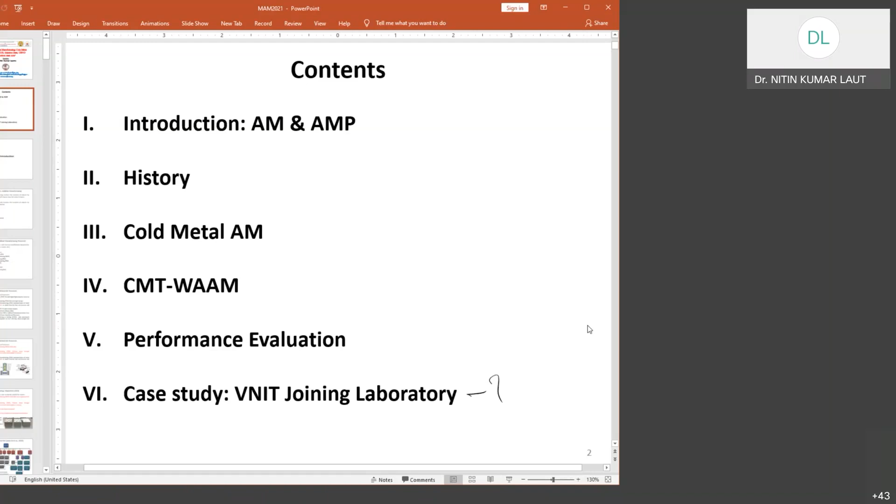Let's start with the introduction, starting with our basic additive manufacturing. As you know, we use additive manufacturing because we have a specific objective: we want to create an object by adding material.

So we are very much clear that we are going to add something, and how we are going to add it, and with what quality, that all depends on the material, the surroundings, and the processes. Obviously just adding material doesn't give us that much freedom, it's not that simple a process.

So obviously we have to search for different methods, different procedures, and CMT, cold metal transfer, is one of those metal transfer processes, but it is also widely used in additive manufacturing.

What is important here is every time we believe that whatever we are adding has to be in layers. It's not true. It could be a point addition where you are making heaps one over the other, like piling up bubbles. So it's not that every time we have to believe in layers, we can do it in other ways also.

Or we can just overlap two things, maybe like a part or joint. Still, that would also be called additive manufacturing. And why I'm discussing all this is this process has the potential to go the other way around, instead of depositing layer by layer, you can even deposit from sideways also.

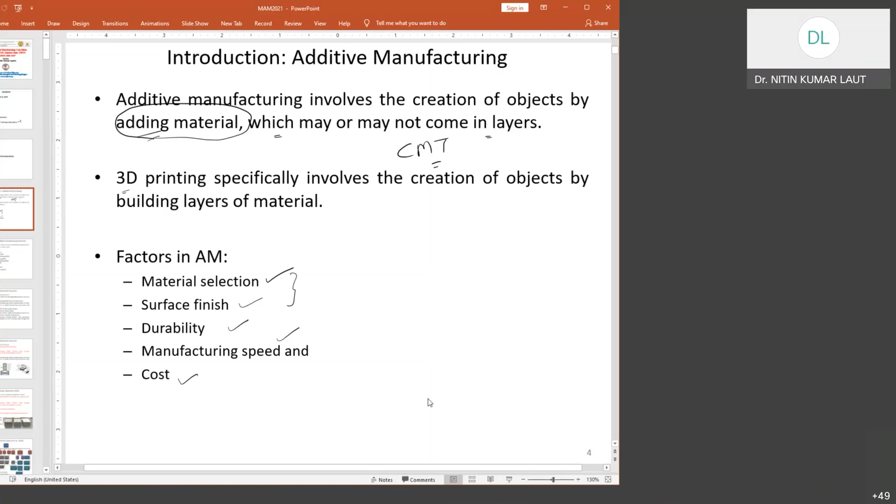But anyhow, it all depends on your application, what your application is, and how you can optimize these factors. As per that you should have choices for selecting the processes. So let's talk about additive manufacturing processes which are widely used and well established.

But there is one more very peculiar thing about additive manufacturing processes: we actually rely on these processes whenever we want to do any internal modification. This internal modification is a major constraint in your conventional manufacturing processes.

The reason is very clear. If you take a simple example of lathe machining, let's say this workpiece is revolving, so your tool has to enter from outside. In some cases, if you want to do boring and these things, you have to ensure your tool is taking a particular path and reaching that position or location where you are going to perform the machining. Now imagine if this is very small, how complex things become and how complex your tool selection and other factors depend on it.

So we have certain constraints here, whereas this internal modification is not that difficult if you switch over your whole manufacturing process with additive philosophy or additive fundamentals. So this can be found very useful compared to conventional manufacturing processes, where mostly we need good flexibility to do internal modification. That flexibility is a major hindrance if you are using a normal or conventional process, because most of the time you have to ensure that your tool is reachable to intricate parts or locations, which is really a challenging thing in your conventional process.

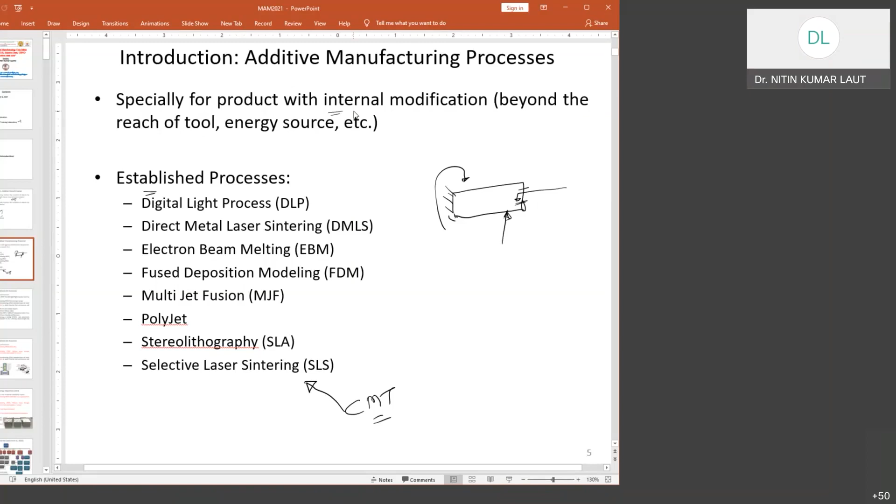We are not going to touch all these processes—obviously it's not the scope of this presentation—but the idea is to show you where our process stands or where we are working. Our process is not as established or as popular as others in this list, so it is still struggling to get a place as an established process among all available additive manufacturing processes.

The detailing of each process, where it is used and for what purpose, is very well published. As per ISO 2010, every process has been properly recommended for specific applications. Some processes require extrusion fundamentals, like FDM. Some require laminated layer processing, like LOM, laminated object manufacturing. Then there's multi jet fusion, where we form a layer droplet by droplet. There's also stereolithography and other old processes that mostly started with polymers but are still finding applications—so there are varieties of well-established processes.

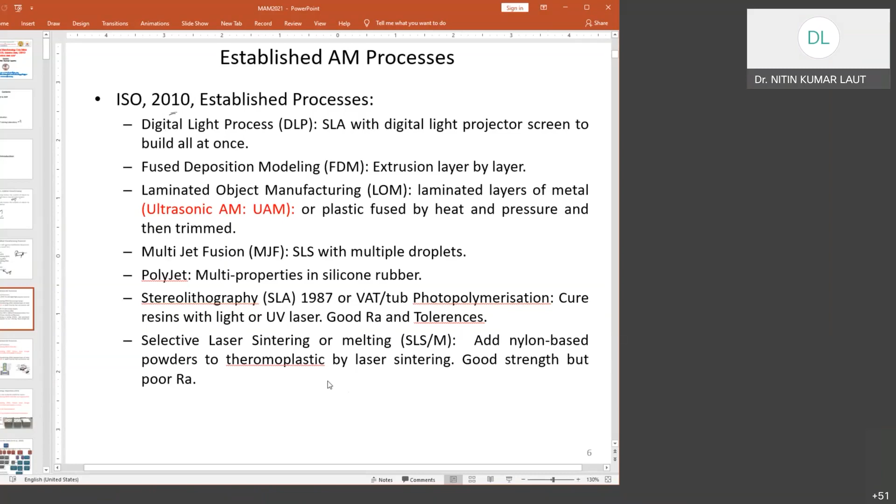So why are we going to newer processes, or why are we researching this newer process? That also you will realize as we proceed further.

The idea of this slide is that there are some specific processes for metal, which is the core focus of this Atal program. We have processes like direct metal laser sintering, so you can have a processing facility with metal. Even electron beam melting facility is also there—these are also established processes.

Even laminated object manufacturing goes both ways, where we can make a product with metal as well as with plastic or polymers. When using metal, we rely on ultrasonic processes, using ultrasonic ramming or pulse frequency of hitting the metal, to build the product layer by layer.

So we have unconventional process interference in metal additive manufacturing, where we use unconventional tools like laser, electron beam, and ultrasonic assistance. These are used to process metals because nowadays there is a need for processing metals. The era of processing polymers through additive manufacturing is losing interest, though it hasn't died off. Now metal processing is coming up because of application requirements, mostly in the aerospace field.

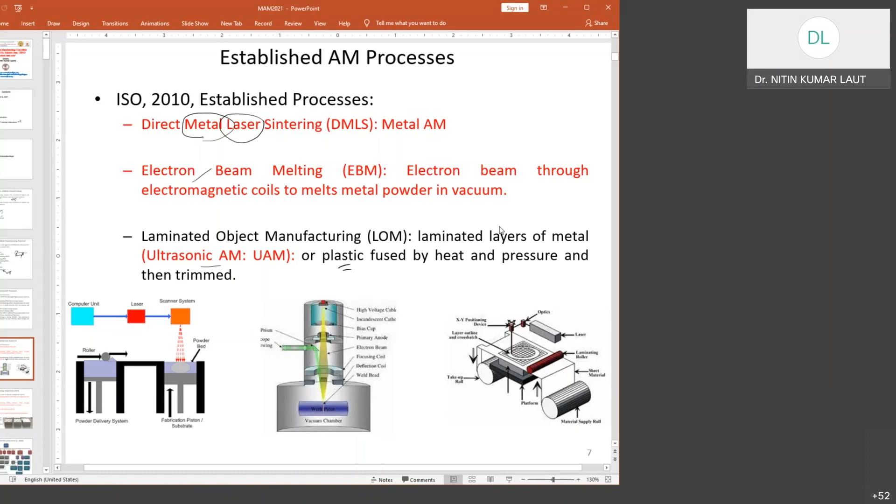When you try to understand this process, its application, and its scope, you will realize there is some gap, some scope which we can always encash to develop a new application, or let's say a new process.

Mostly when using metals, we have two options: either we use metal as a powder form—again recommended in 2010 by ISO—or we use wire. So either we sinter powder, or we melt wire to form a layer by layer product. All these are covered under the philosophy of direct energy deposition.

Mostly these applications started with repair work, not for building any product. Nowadays they are being used extensively to manufacture products.

As you go down from laser to EBM to ultrasonic to metal binder jetting process, you'll find the reliability, robustness, and confidence of making the metal additive product getting degraded. The process establishment you'll see in laser assisted processes, like LENS which stands for Laser Engineered Net Shaping, gives more flexibility, confidence, and reliability. So lasers are overruling additive manufacturing, no doubt about that, followed by EBM, then ultrasonic, then metal binder jetting. But most applications are surrounded by laser as the major energy provider process or tool.

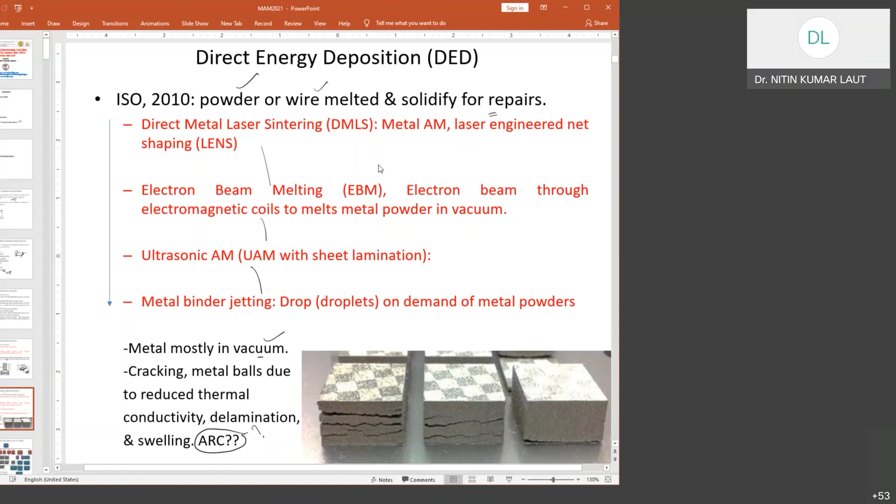So here comes the basic requirement or necessity of going to a newer process, which we will be discussing further. The idea was to give you a background on why we are moving to a newer process, because we have to see if we can get better facility in terms of vacuum, can we avoid that requirement. So yes, we have this process CMT where we don't rely on vacuum. Cracking is also less, we don't allow the layer to form metal balls - it depends on your material and parametric settings. Delamination is also less, swelling is also not allowed, because the process is getting adjusted within microseconds or seconds. There's a lot of physics going on which tries to ensure this can be reduced or controlled. So let's switch over now to the processing of things using electric arc.

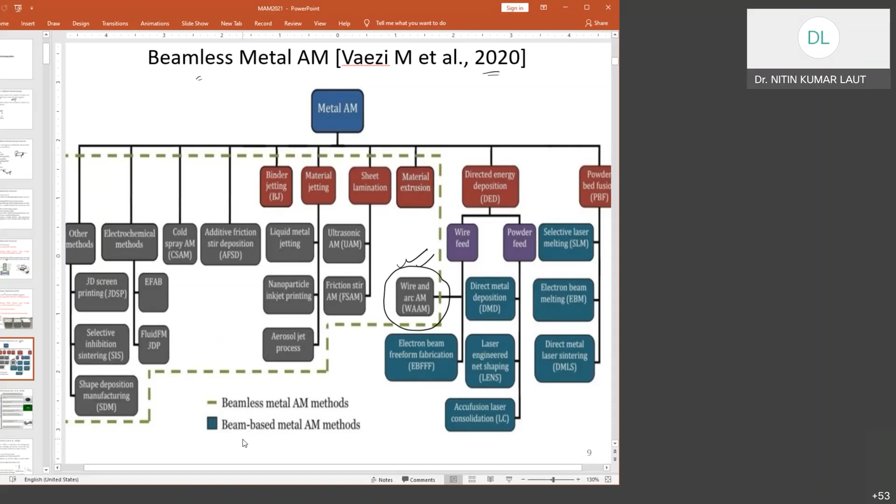So we are discussing, or will be deliberating on this domain, which is a part of beamless metal additive method. This is from recent reference. We have built enough background, and I don't think there is a need to tell you about the historical development in metal additive manufacturing. Maybe some speaker might have covered it also, maybe in coming days they might be covering the things.

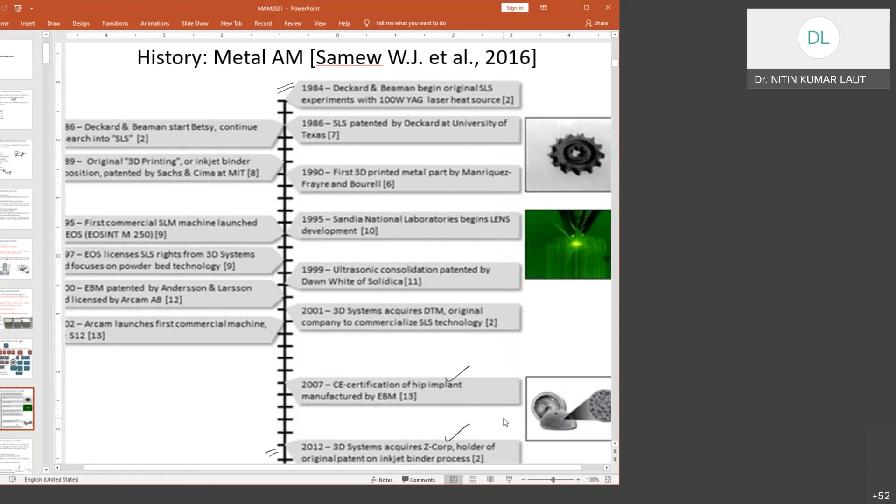The idea of presenting this slide is to see the era from 1984 to where we are now. There are a list of developments, but nowadays you'll find the development of additive manufacturing is diverging to many fields, whether you talk about biomechanics or aerospace products and lot many things. People are still working on that, so the area is still well researched. In other words, in some areas you'll find a lot of research is required.

So we will come just at the boundary of cold metal transfer, but we find some similarity of this cold metal transfer process to yet well established process, that is cold spray additive manufacturing. If you can anytime refer this paper, you will understand that people are developing good understanding, or well optimized process understanding, on this cold spraying.

This cold spraying basically works in solid state, where there is no proper melting to allow the metal to reach the melting point. There are different physics which we will be using, physics of friction stir, ultrasonic welding. Mostly this cold spraying is suitable for non-ferrous material, like aluminum, magnesium, and copper, and mostly this cold spraying is used for coating purpose, where we try to spray the powder with high velocity.

But if you want to use wire, and deposit this wire as a coated thing, obviously then you cannot throw the wire with high velocity. So even this process appears to be one of the solutions, but still the scope of using wire is lagging. So now we are building why we are going to a new process, because I have to show you the disadvantages or limitations of other processes which are in close periphery or competitor of these processes.

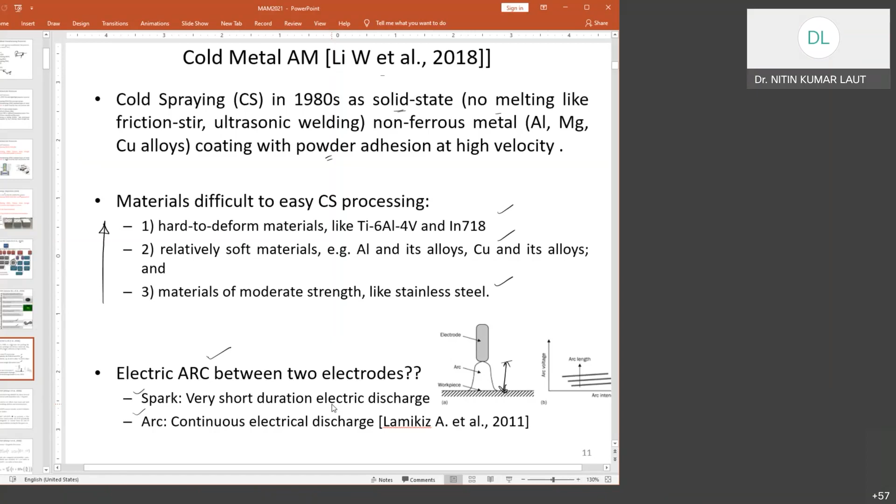I hope we have built up enough background of these surrounding processes which are near to cold metal. So now let us come to the process which is the agenda of our discussion, that is cold metal additive manufacturing. Details are very nicely narrated in Zhang's paper published in 2018. There are other papers also, but I found this detailing very simple and effective.

So when we talk about cold metal additive manufacturing, mostly this process, in short, is written as CMT, which stands for cold metal transfer. Now, although this is a misnomer word that things would be cold, and if it is cold, you cannot transfer metal because it will be a solid object.

But here the cold word is actually a relative word, relative to your expected heat input, it is much low, and that's why it is concluded as cold metal transfer. So metal will be hot, but not that hot which you expect with the voltage you are providing, or the already well established fundamentals of electricity and electric arc generation. They are not matching with this metal melting. So it is relatively very low, and that's why we say that it is a cold metal.

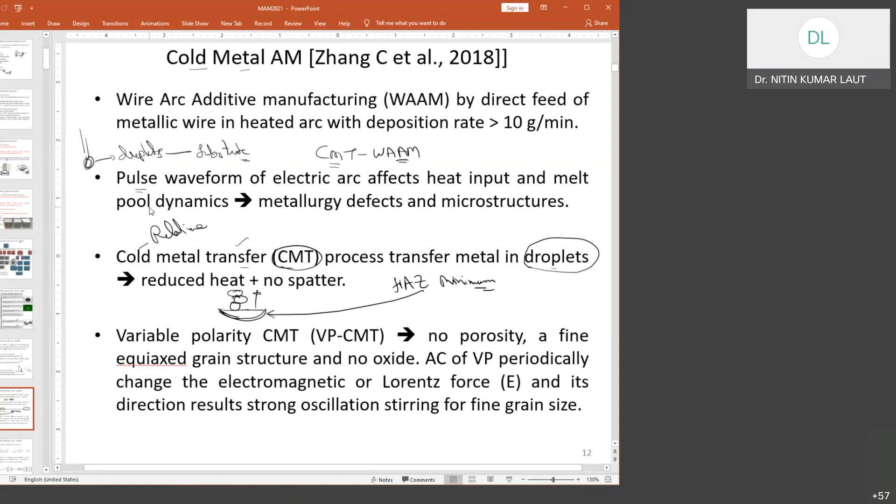We'll understand the mechanism here. This pulse waveform control gives you the droplet facility, which affects your heat input and melt pool dynamics - one of the dynamics I have discussed with HAZ, heat affected zone. So obviously if you are working with controlled heat, your metallurgical defects or microstructures are much improved than any other normal electric arc process.

As we were discussing the variation of processes in terms of pulse waveform, the same thing is narrated another way using the same philosophy of electrical engineering, that is variable polarity. So we can work with different polarity if we are not comfortable with pulse waveform control - you have the facility of playing with variable polarity. Those who have worked in electric discharge machining would understand the importance of polarity, and if you want a particular surface finish, how you play with that polarity.

The same thing happens with another version of CMT called VP CMT, which stands for variable polarity CMT. You vary the polarity between two electrodes, and what you get is an effective property with no porosity, a fine equiaxed grain structure, and no oxide formation. You also work with this electromagnetic force or Lorentz force - you can play with this force because in weld pool dynamics, this electromagnetic force plays a major role in developing or controlling the defects.

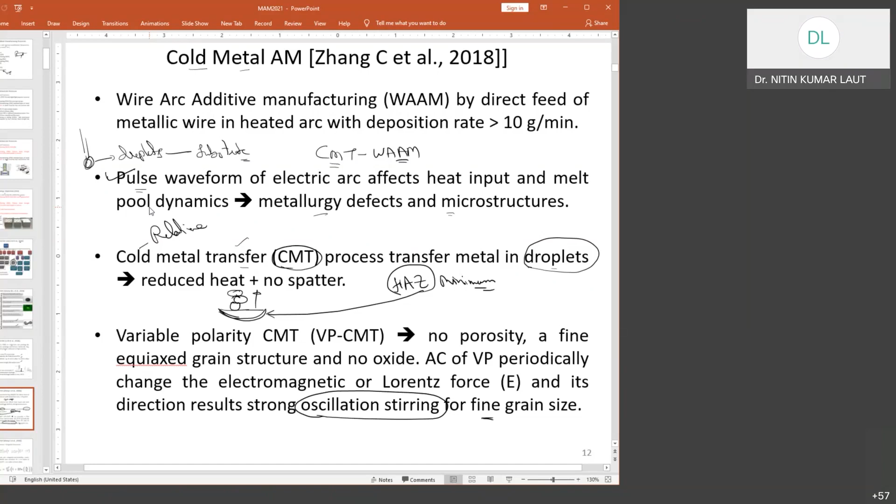Because we are changing this variable polarity, one of the biggest advantages we get is the facility of stirring or mixing the droplets, or the composition of the droplets, so that you get a good fine grain size, which is very much required to have good strength in your material, the substrate.

So I think now the basics of CMT we have made clear, but yes, there are a lot of numerical simulation works also ongoing in this field. Since we have talked about electromagnetic or Lorentz force, these forces depend on the current density vector and magnetic flux vector - we generally work with the cross product of these current and magnetic flux vectors. And if you try to relate these vectors with the geometrical parameter of your wire, you will find we try to include R and Z, as if the wire is in the form of a cylinder.

So obviously, if you have a cylindrical wire, you know what you have to consider. This is the R, and the height is your Z. So even this electromagnetic force has some dependency on this geometrical parameter.

Directly you can't use powder, wire will always be there. That's why the electromagnetic force equation will surely have terms like R and Z all the time, because that wire presence is a must in this process. Otherwise, how are we going to create that R?

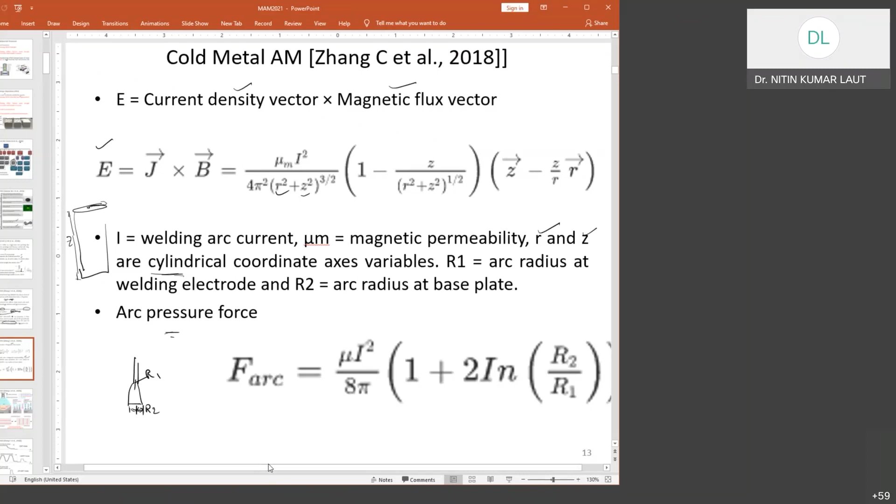So you can understand that even the dynamics of generating the forces are also not that complex. The only thing is it's in the logarithmic form of this geometrical radius.

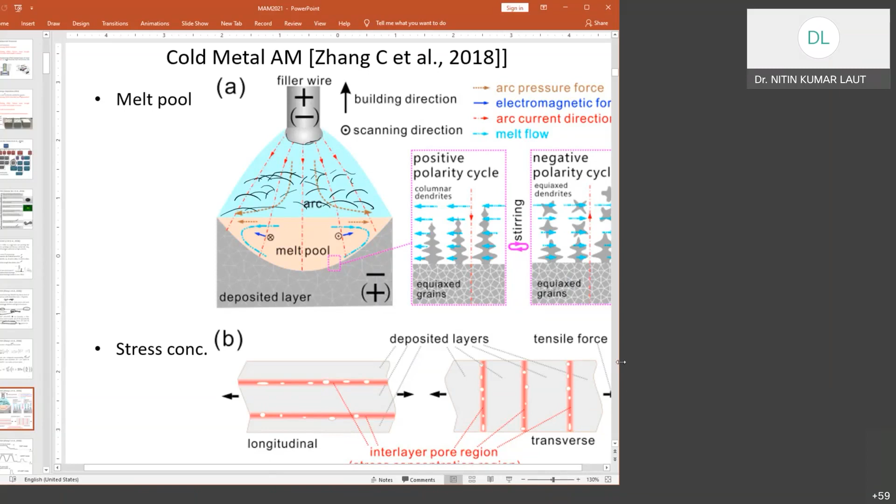So here the added advantage we get is proper stress concentration control, because we are actually not working with high intensified heat. That is again a controlled heat, or let's say a cold heat, relatively cold heat. So even the issues of stress concentration, specifically at the interlayer, are also less in this process.

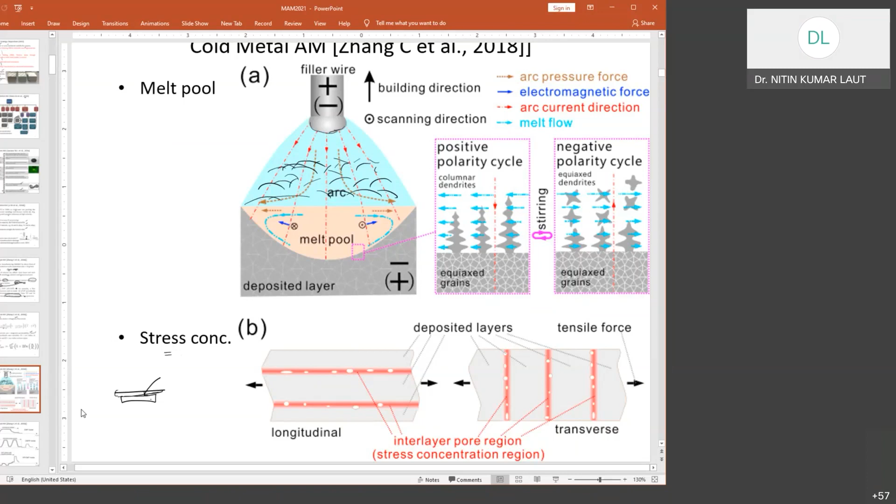Because once you deposit layer by layer, there is a lot of stress concentration between this interlayer region, because the material properties of the bottom layer and top layer are totally different from each other, and getting a fused joint between them has to bear the problem of stress concentration. Since we are working with relatively low temperature, this problem is not a major issue if we are going for the cold metal additive manufacturing process.

So as we were discussing about the pulse modification or waveform modification, when you have cold metal transfer mode as your standard mode, you'll find they believe in two different phases. One phase is the short circuit phase, where your electric arc is actually touching your base metal - that is called the short circuit phase. And then you have the burning arc phase, where this arc is being burned or supplied with heat, so that it gets detached from the electric arc and gets deposited on the substrate.

But this is a standard CMT mode. You are having other modes also - this thing we have discussed, variable polarity. Now this CMTP stands for CMT pulse mode, where you try to change this phase into a pulse phase.

So you make a trapezoidal pulse form, so that the heat distribution - if you try to take this area, and if you try to take this area - you will find if you are breaking the whole heat into a number of steps, it gives you better control or better focus on your heat distribution.

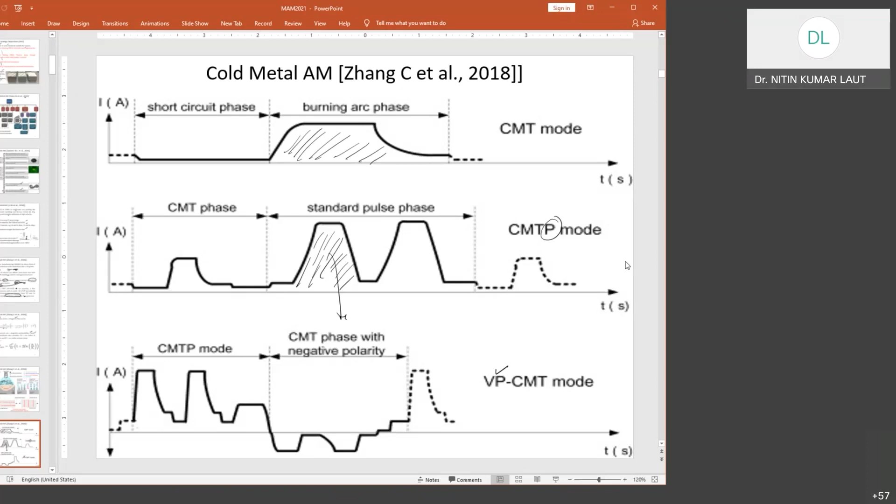So CMT mode is one, the CMT pulse mode is another, then variable polarity is yet another mode, okay, of the same transfer of cold metal from the wire into the weld pool zone. So we have various versions or facilities to deal with this CMT process. Anytime if you want more reading, please refer to this paper. It's a very good paper.

Now if you try to compare the parameters on numbers, you will find if you are going with normal CMT, you can keep your heat input the same, or even your interlayer wait time. So what is this interlayer wait time? You have to see that your first layer is formed, and then after a certain time, where you fix a temperature to be achieved at the top layer, after that temperature your other layer gets deposited. So even if you keep that time fixed, still you will find that the arc current or arc voltage keep on changing, because we have to play with the pulses.

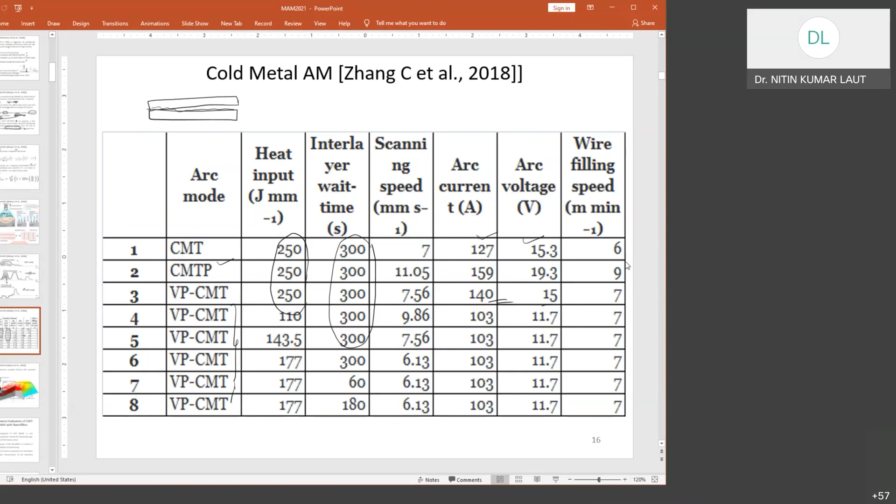The pulses are modified, so as per the pulse, your properties or parameters of current and voltage are also going to change. So you can find some changes here, but when you switch to variable polarity CMT, you try to fix the arc current and voltage, but the only thing you change is the nature of the polarity, to get the same or similar effects. So variable polarity is not that popular, but playing with these pulses is mostly a research domain, or most applications get good results just by playing with the pulse waveform, which again is the backbone of this process.

If you refer to another process where they have discussed the detail of metal transfer using simulation and validation studies, anytime you get a chance please refer to this recent paper by Cadiou, 2020. This process tells you, and color-wise also you will realize, this is the heat transfer. If you can control this relative heat transfer, the solidified zone is followed by this zone, which is again a very narrow zone. So your solidification rate is also very well controlled or moderate, because you are depositing relatively cold metal here, so the stresses and the temperature gradient drop are all very well controlled.

And this is the wire movement, because the droplets are getting deposited, it has to be compensated with the wire movement. All this data we have already discussed here - what would be the wire movement, the wire filling speed, all this is there. So this is our plasma formation, and these droplets, how they get deposited and how you get layer by layer - all things are very well described here, specifically the droplet mechanism. A very nice detail of this droplet mechanism is given in this paper. Otherwise, we have already discussed this.

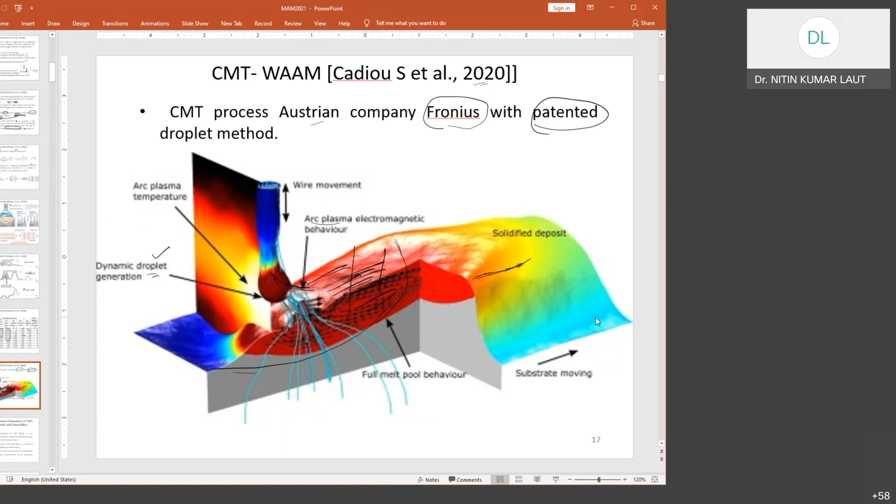So as far as the background of this CMT process is concerned, historical perspective - this CMT process has been developed by Fronius company, which is an Austrian company, and this is a patented process. Although it relies only on droplet transfer small physics, the way they have achieved that is patented. Fortunately we have this facility, and although it's costly, it is very effective and shows better results than the nearest processes we have, metal inert gas welding and TIG. This CMT is showing better output or results in terms of product manufacturing or product welding or joining.

So now, after a brief discussion on the process as such, let's show the output, because nobody will believe it unless we give you the performance output we got. This has not been published anywhere yet, but it's what has been researched and obtained in our lab at VNIT Nagpur, where we have assessed the performance of the process using a nanofiller. So we have wire here, and we have powder, but the powder is in nanofiller form. So all these things are used within the domain of wire metal transfer.

So we set an objective where we used this process under the umbrella of WAAM on 316L stainless steel to construct a 3D part, using additive manufacturing as the basic principle. So far we have achieved that with different complications and problems. We have also studied the influence of nanofillers or nanopowders during the development of this 3D product. We chose a complex product, but I'm not going to present those results here. I will present the simple layer to layer manufacturing process, which is part of this 3D process.

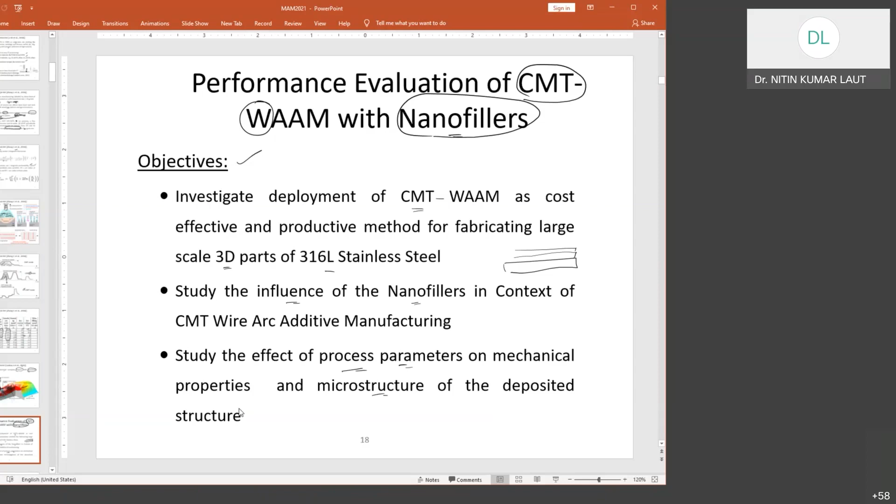So let's go into the detailing of this thing. I hope time is there.

All credit for this goes to my two PhD students. Anand Vamshi is one of the dynamic and hardworking students, and the other is Amit Motwani. These two are really working hard on this, cracking some out of the box results. Unfortunately, I'm not going to present that because we still have to do a lot of iterations to develop confidence in it.

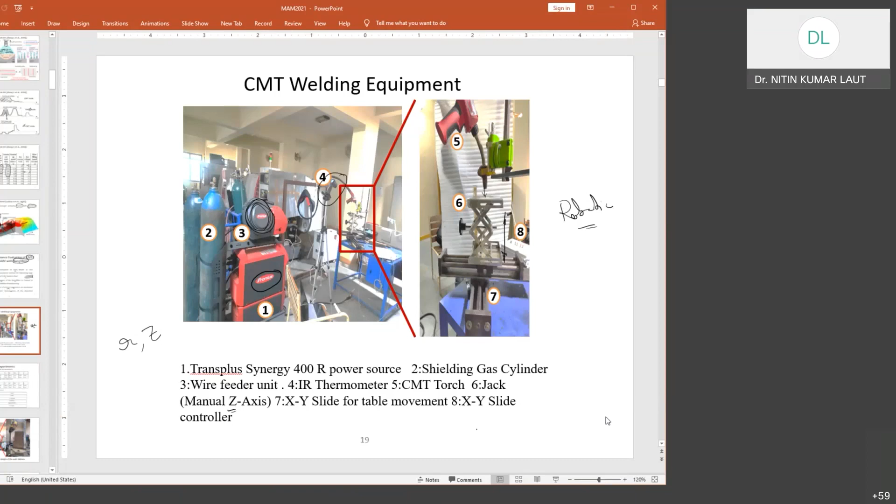Yes, somebody - am I getting some query? Anything from any participant? Do I have to address any query? Okay, by mistake, I think.

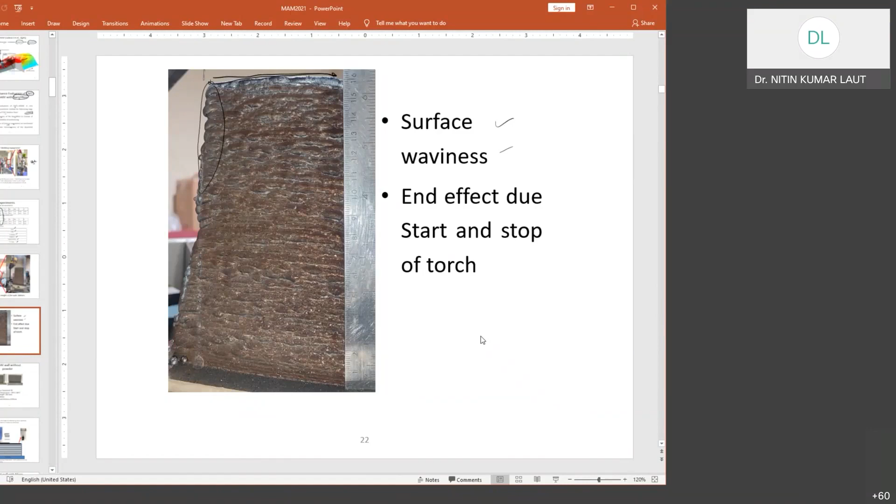So there is a comparison where we have used the process with powder and without powder, so that we have a better understanding of the role of these nano powders whatever we are using to generate the layers. So these are some of the parameters.

50 layers are being deposited, and here's an important thing: these researchers have tried to ensure the interpass temperature between two layers. So this is one layer and this is the other layer, and the temperature in between these two layers is called interpass temperature. They have ensured this using an infrared temperature measuring device, making sure it is dropping up to 150 degrees centigrade, plus or minus.

And after that, they are ensuring that they are depositing the second layer. So it's not that they deposit continuously one layer after another, but they are stopping, ensuring the temperature drops to this optimized level, because this is the optimized heat desirable to get a proper joint. Again, after reaching this interpass temperature, they deposit the second layer, then wait, then deposit the other layer.

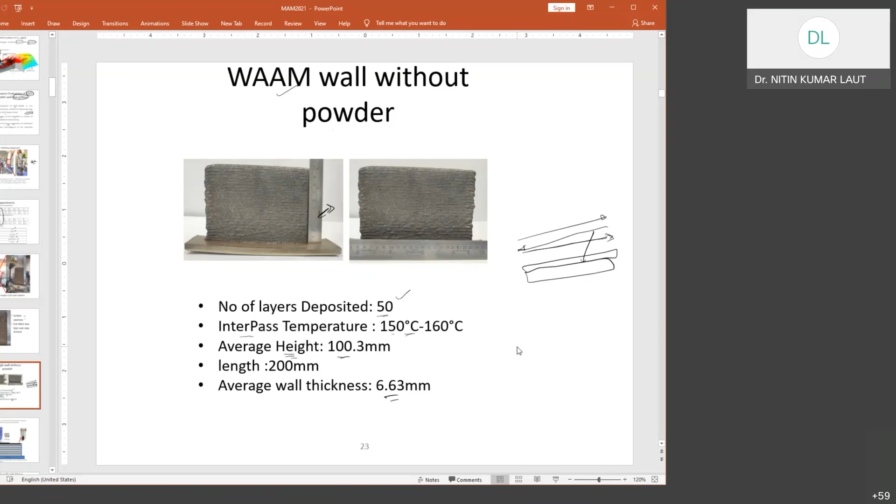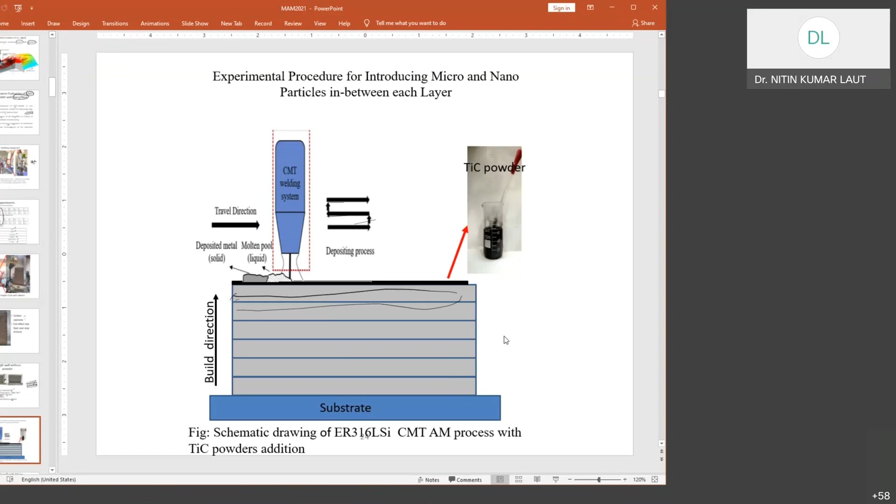So we have compared the additive manufactured product with and without powder, but specifically we have used nano powders.

This is again some more confirmation with nano powder. The earlier case was microparticles of 2 to 5 micron size, and this case is nanoparticles of 50 nanometer size. So we had three variations: one without powder, and with powder we developed the product with micro and nanoparticles.

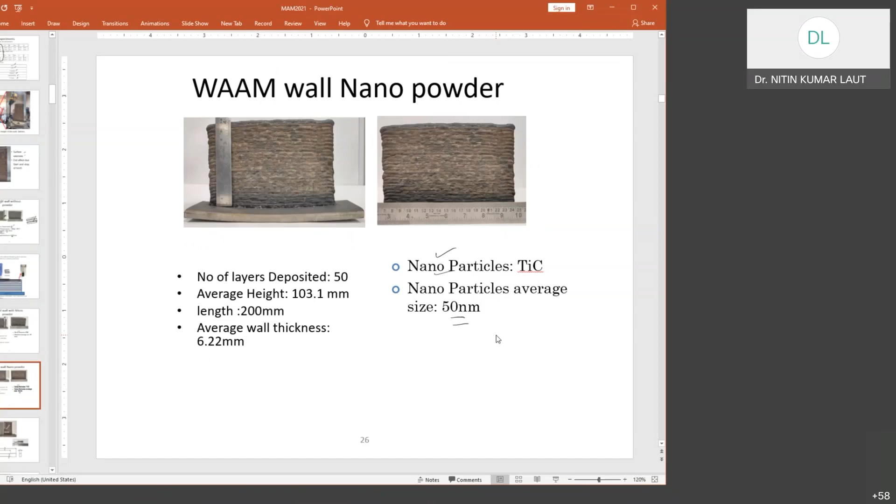For characterization, we cut standard specimens to check strength, and while cutting these samples, a proper procedure was followed. We used standard wire cut EDM process to cut this, so that we don't induce any extra mechanical stresses or residual stresses while cutting the specimen.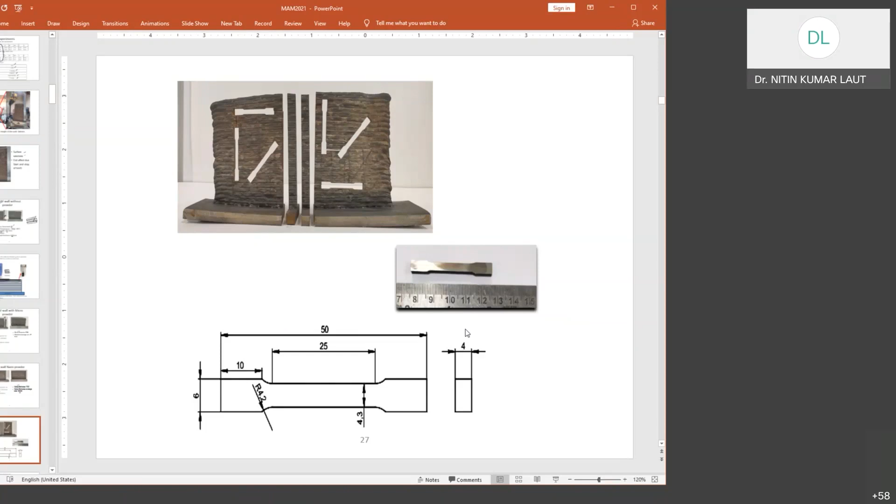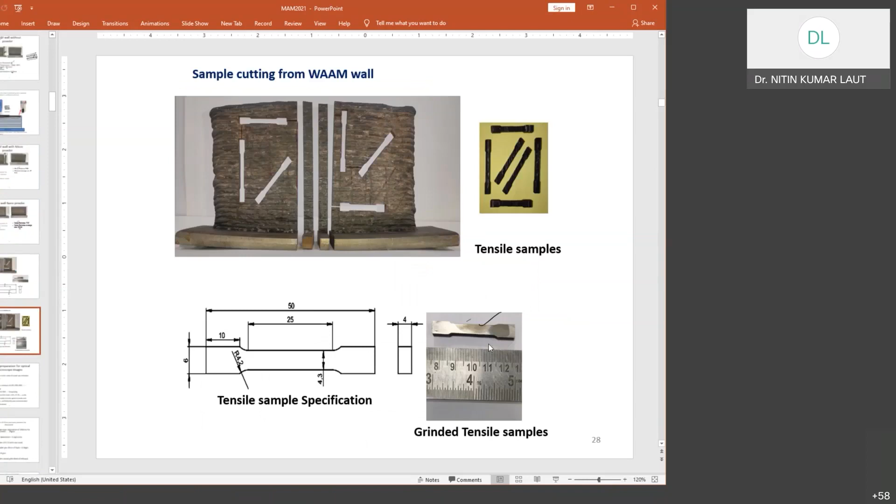These are the specimens cleared from the developed layer. Before testing, a procedure was followed for preparation of samples—these are all regular processes, nothing to do with the CMT process, like degreasing and improving the surface finish. These things are nowhere affected by the CMT process.

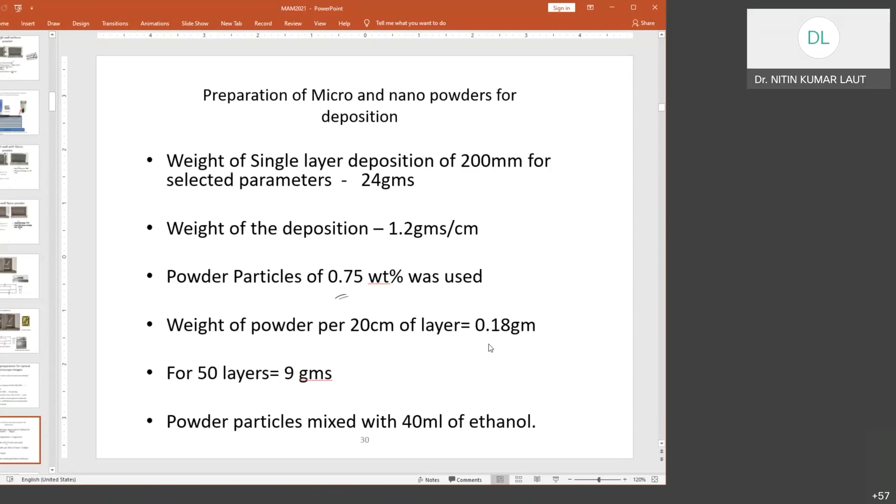I'll skip this, but efforts were made as per procedure to make this a standard specimen. These are different parameters, may not be directly linked with the process, but powder particles of 0.75 weight percentage were used. These are descriptive things, but here are the results we got.

We still need to see if we can get better grain distribution or microstructure, although this isn't bad since we hardly get any defects, foreign inclusions, porosity, or cracking. This means the addition of powders, specifically nano powders, carries some meaning in the process. We are still working on that.

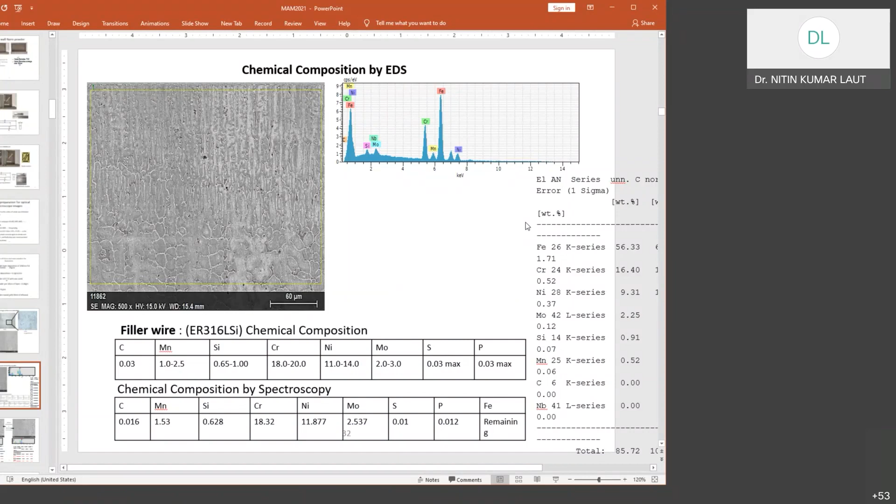That again is a good observation. Despite subjecting the process to a lot of heat and many layers, we're still getting a somewhat moderate composition distribution over this layer, specifically the central layer.

This shows the phase confirmation, and we get some unusual components. We are still checking this nickel, chromium, and molybdenum content. This is a matter of research—the idea is we get some unusual observations, but unless we get confidence with more processing, we cannot jump on any physics. We are still examining more samples to get more know-how about how these newer elements are getting added.

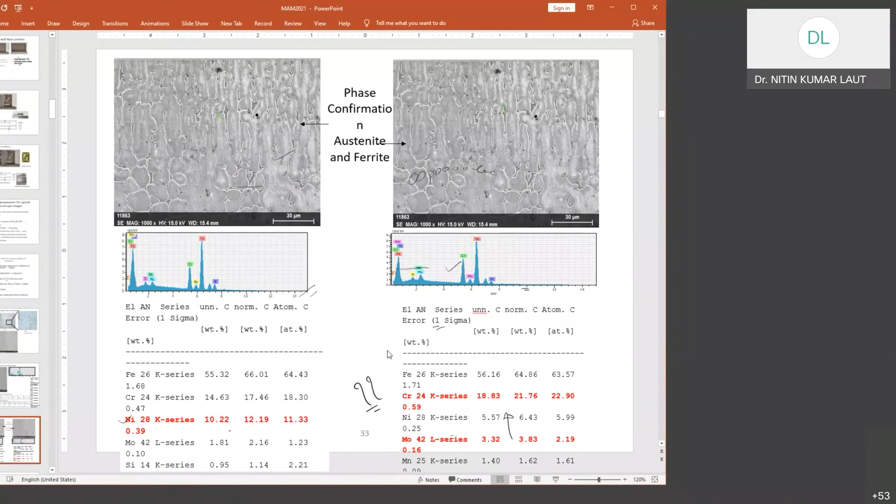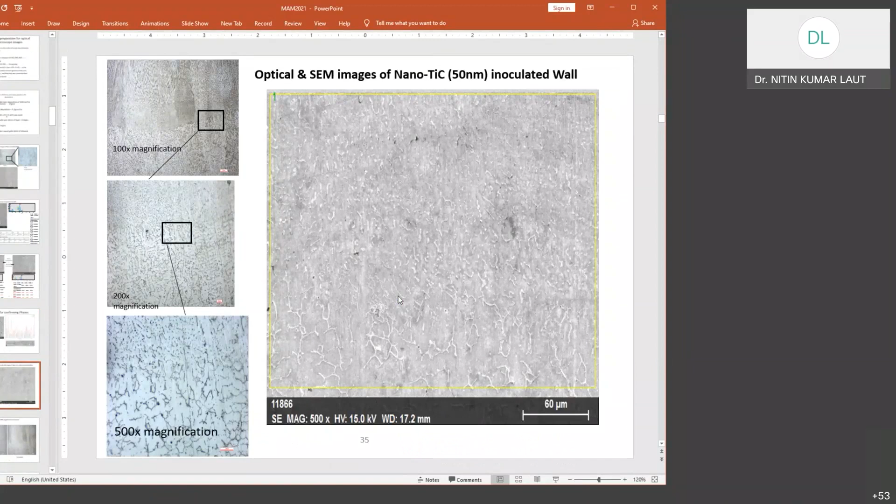So this is not that important, but we can see this addition of nanoparticles. After adding nanoparticles, we could hardly see any major changes in the substrate. But as far as strength and other things are concerned, we'll find some better improvement in that.

So these are all magnified images, elemental distribution, and see the distribution of titanium, how uniformly they have been distributed. Because in an earlier slide we talked about the stirring mechanism generated in the droplets of CMT, which again depends on that electromagnetic force we discussed earlier, and the effect of that we have got it here.

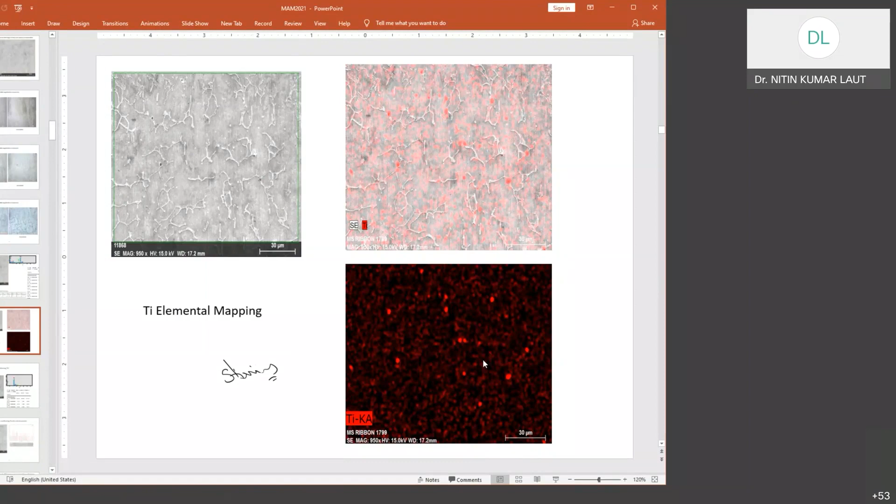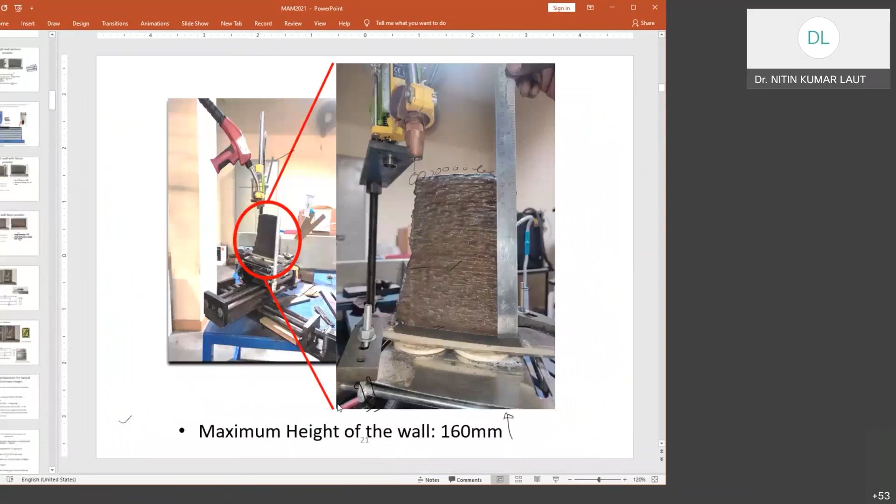You can see how nicely these titanium elements are distributed over the microstructural sample. What mechanism, the stirring mechanism? I think you might have joined late, so I will take you to that slide where we discussed how this stirring happens.

You see this somewhere, the oscillation and stirring of the material particles in the droplets because of this electromagnetic Lorentz force. Because of that we studied this model also, since it was important at a later stage. That's why I made it very clear at the initial presentation. Is it okay? Somebody was curious to know what that was.

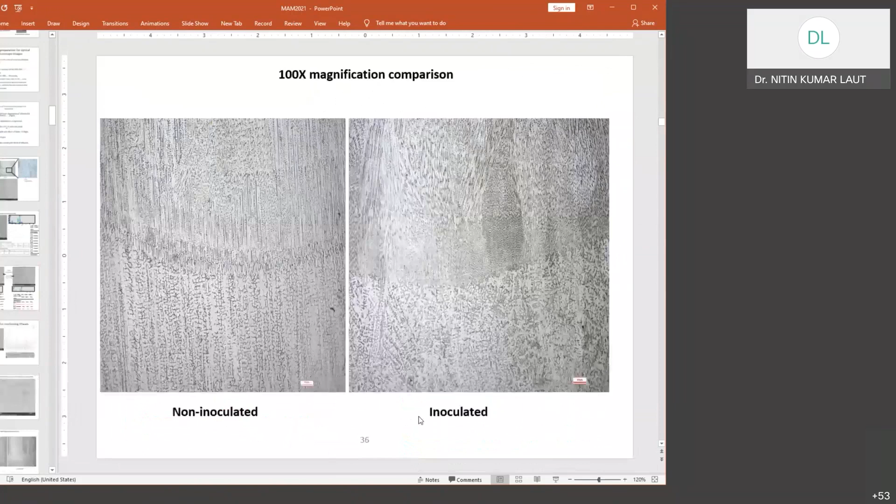So this is your z-axis. Then you will find at the center. Now you will understand why we chose the sample at the central location, because if you see the two extreme ends, you will get a lot of variations. But here you get a clear-cut demarcation, a clear-cut understanding, specifically at the central layers.

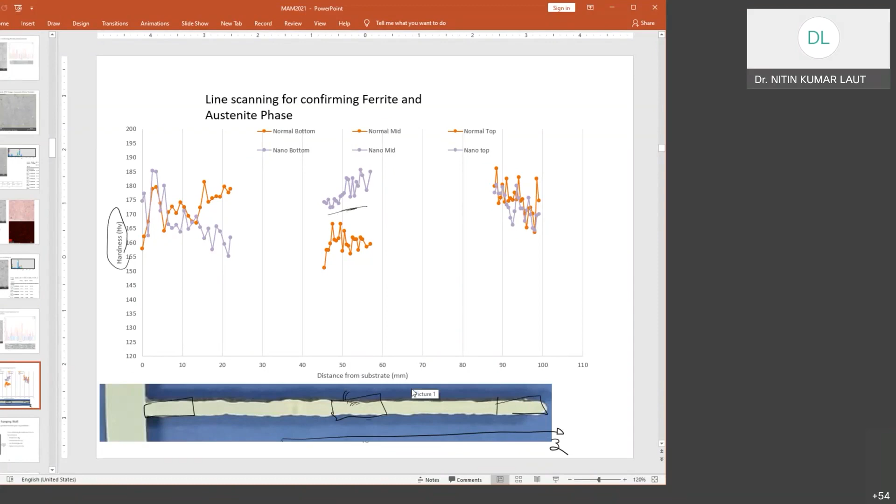Of what is the distribution of another property, mechanical property, that is hardness. So you get better understanding, better clarity of hardness variation, and the effect of addition of these nanoparticles in this CMT process.

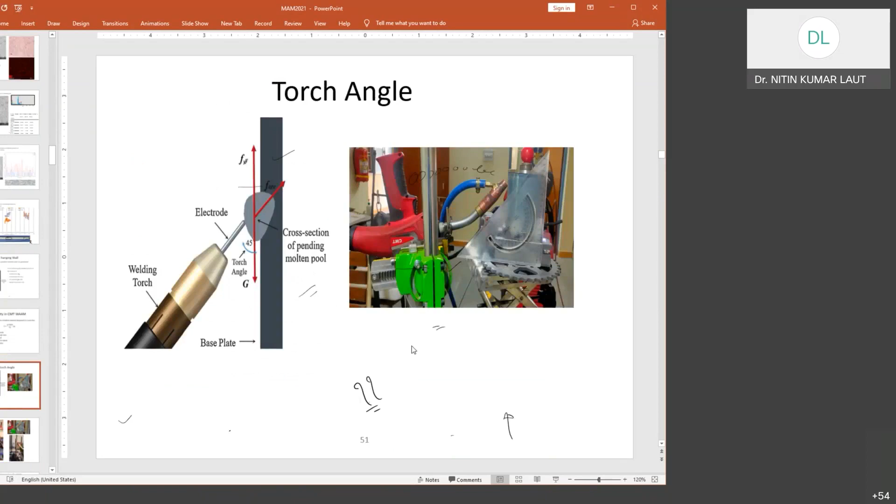I think I have to restrict myself, as these are all current researches which are going on, so I won't discuss them. Just to recap what we discussed earlier, through this slide we'll try to go to the recap.

So we have a process used in additive manufacturing, that is cold metal transfer, which uses the filler wire, generates the arc, and in the weld pool generates the droplets. These droplets get deposited, and this process continues because the wire is being moved inside the torch, and this is all electrically controlled using the pulse forms, and as per this pulse formation they control the droplet feed or formation of droplets.

Just to give you a quantitative figure, this droplet deposition takes place 65 to 70 times in a second. So it is that fast. We have procured a high speed camera also to capture all these effects at a higher frame rate, because this is a very fast process, and this is all pulse distribution.

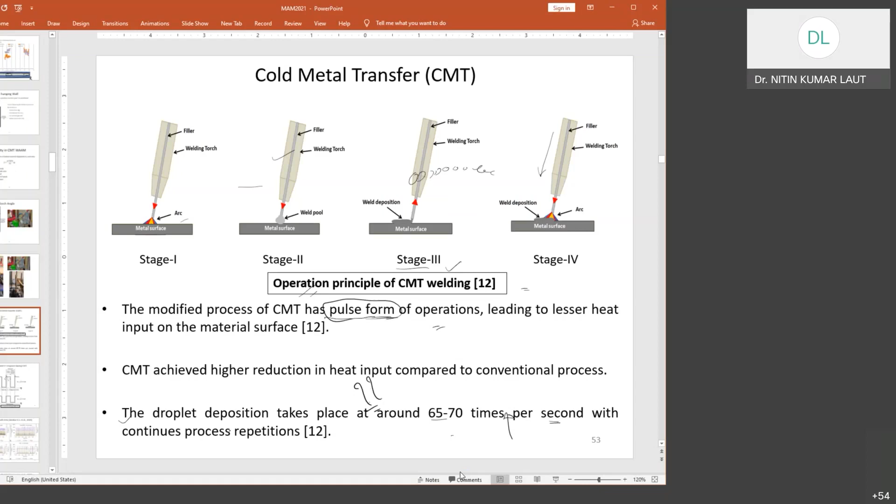I think we have already covered this, but there are some phases like the arcing period, which we have to control, and the short circuiting period, because these two periods form the whole weld cycle. But the interesting thing you'll find in CMT is, most of the time this current is usually kept well stabilized compared to the voltage.

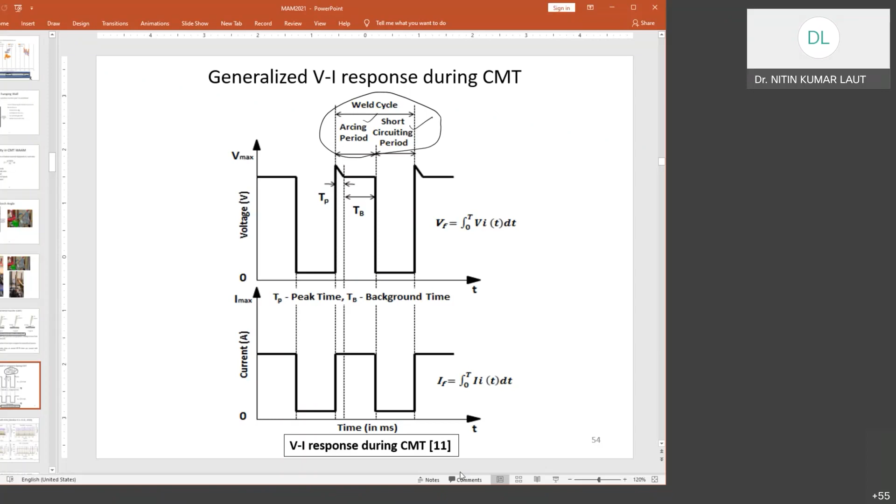In an earlier slide we saw that this arc length gets affected by voltage. So the process is also playing with the voltage waveform rather than the current waveform. So most of the time we'll see it is a stabilized waveform as far as current is concerned.

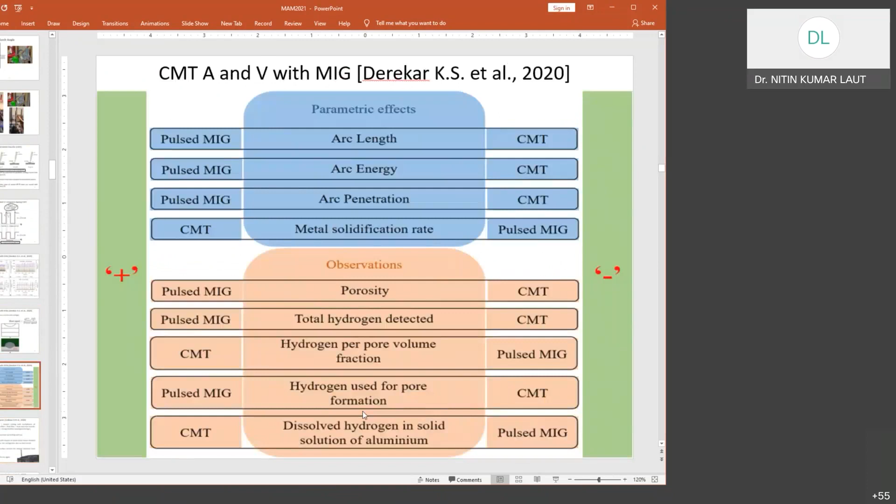So I think with this, I have other case studies also, but I think it is 4:15 and I have to give 15 minutes for discussion, so let me...

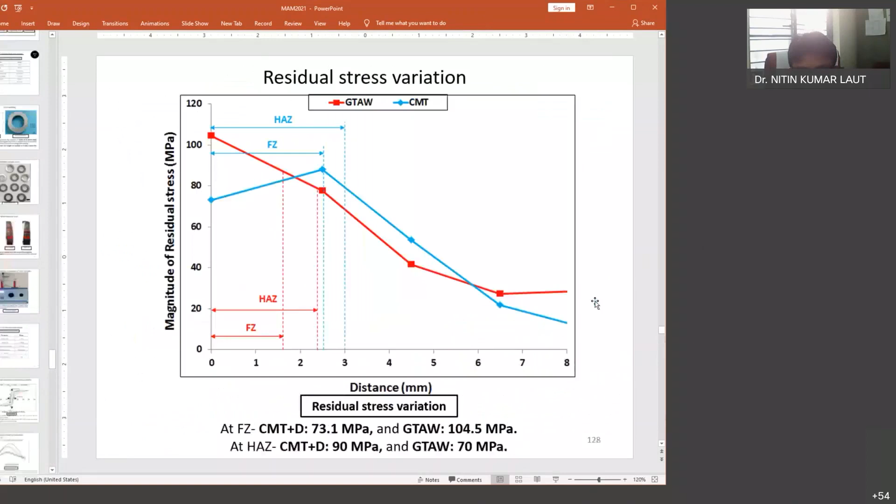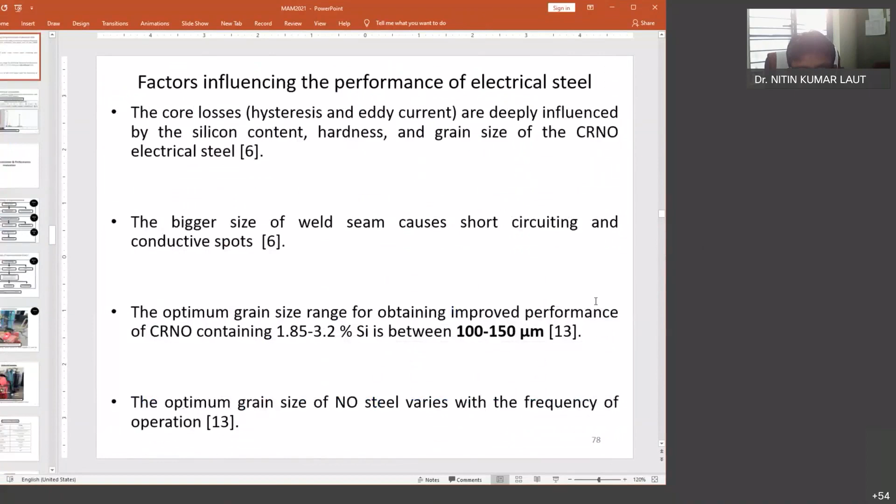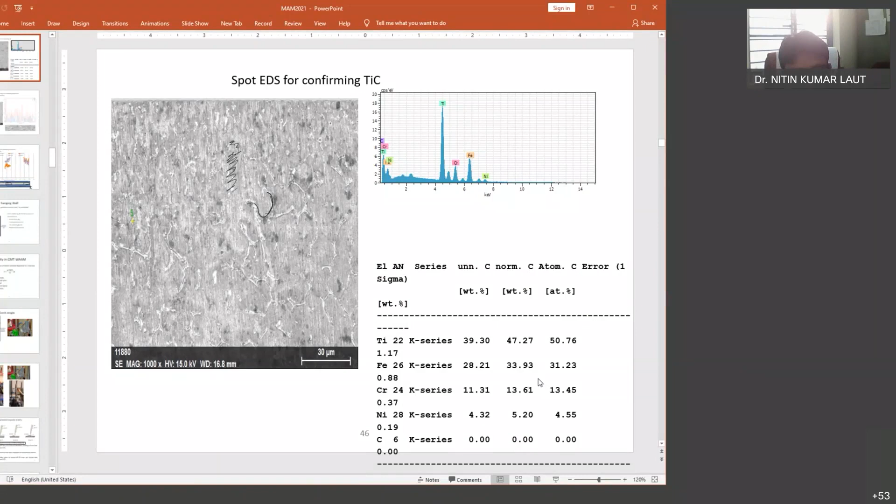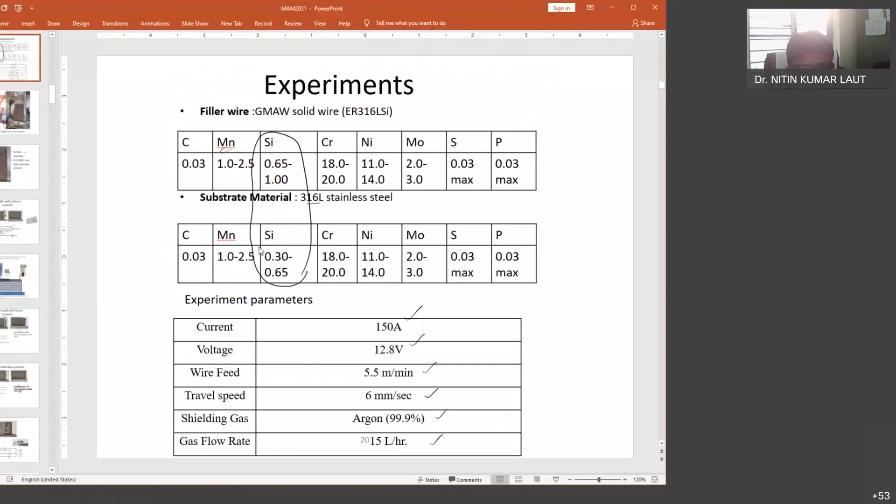Okay, so that means it is a I'll show you the fine grain structure we're getting because of this. And the reason is quite clear here, because if your grain distortion, one reason is your high temperature, and since we are having control on the temperature, it was very obvious to get much finer grain than other processes, let's say in terms of MIG and all. The same thing I have already discussed in some slide, the effect of temperature on grains.

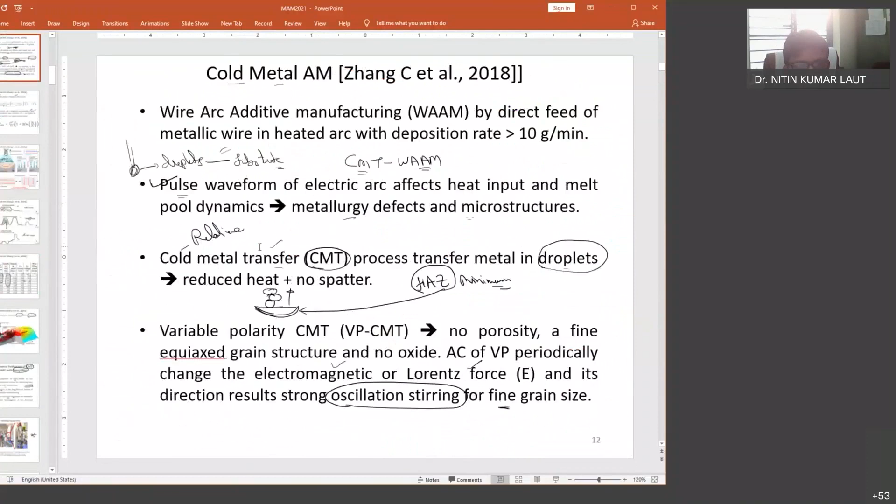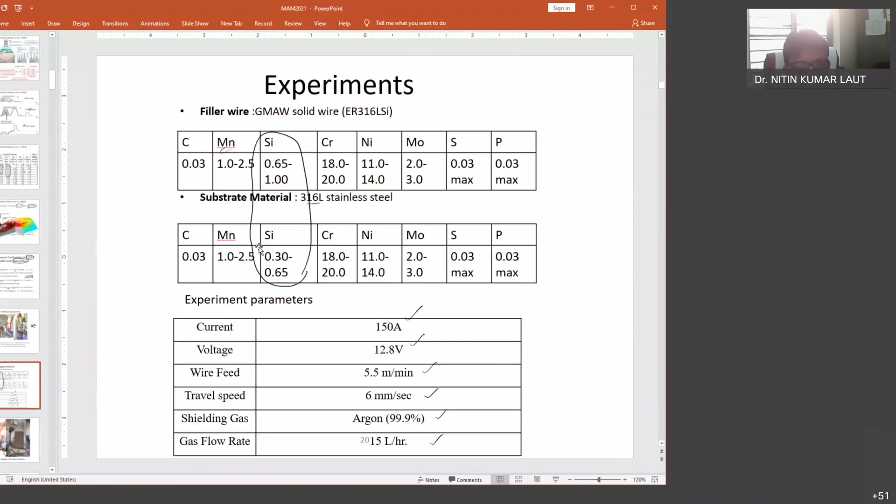I think somewhere I have discussed that thing, but not able to recall where I discussed it. It's there because of temperature. I think in some slide we discussed that if you have better temperature control, definitely you are going to get fine grain. Is it okay? Have I answered your query? Yes, sir, thank you very much.